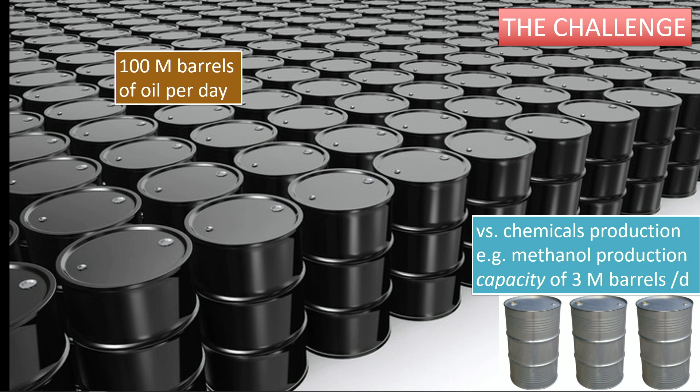To give you an idea about the size of that challenge, if you take an example from the chemical sector, the example of methanol, which is now being produced as a building block for the chemical sector, there we're talking about 3 million barrels per day of production capacity. So almost 2 orders of magnitude difference between the chemical sector and the fuel sector.

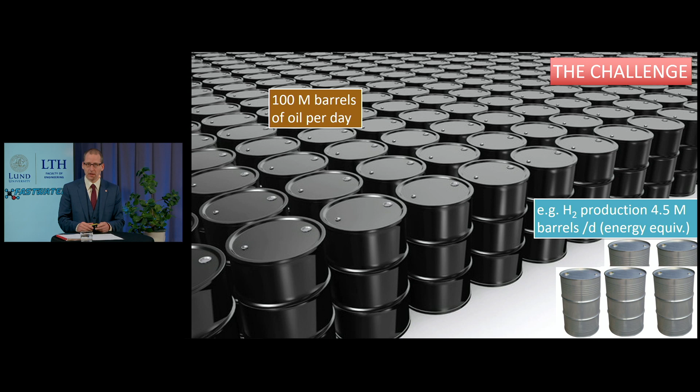Another example: there's lots of talk about hydrogen these days. We're already producing hydrogen in pretty large quantities, talking about 4.5 million barrels of oil on an energy equivalent basis. Of course, almost all of that hydrogen is currently being produced from fossil sources, or used to help produce fuels like gasoline and diesel. So clearly this is a huge challenge. How can we actually move away from being reliant on these huge quantities of fossil energy, and how can we get in the end to a future sustainable society?

Sustainability, of course, is a very broad topic, so we'll limit it today to energy. There's comforting data out there: can we move away from fossil energy? Yes, we can, because there's plenty of renewables out there. If we look at the potential of solar, wind, and bio, we can clearly cover our needs. Solar energy alone, for instance, covers about 15,000 times the amount of oil we're currently using. So the potential is out there, but there's a gigantic challenge to scale that up.

And we have another problem with renewables. Maybe there's enough of them out there, but they're intermittent - the sun isn't always shining, the wind isn't always blowing. On top of that, they're not equally distributed around the globe. So next to scaling up the availability of renewables, this needs to go hand in hand with scaling up large-scale energy buffers. Depending on where you are around the world, it will probably also be necessary to import energy - not all continents will be able to be self-sustaining in terms of renewables.

And if you look at what you need to store energy on a really massive scale, it appears that the most economic way to do that is in a very compact way of storing energy, which we know as fuels. So fuels will always have a role to play in a future sustainable society. Where do those fuels have to come from? Well, they also have to be produced from renewables, of course, to make them sustainable.

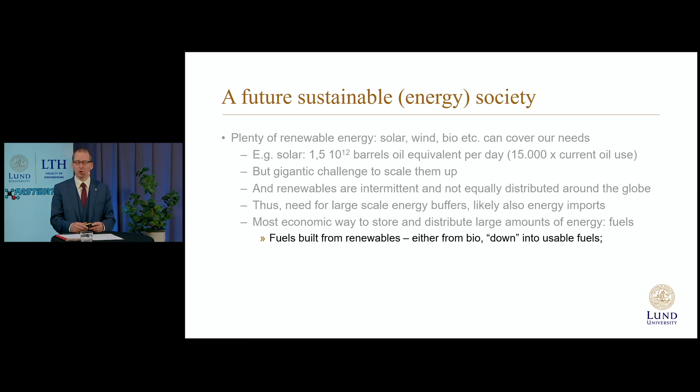So on the one hand, you can look at biomass and process that down into fuels. On the other hand, we are currently looking at, and also producing, fuels from the ground up - starting from green electricity, producing hydrogen, and then building more complex fuels or green molecules from that.

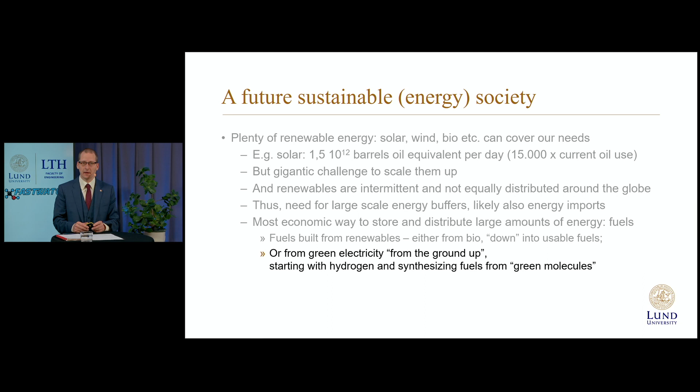So what we're talking about is roughly an energy system that could look like this in the future, where we're relying on renewables - solar, wind. The balance between those will depend, of course, on where you are around the globe. We produce green electricity that we supply to the grid directly - that's the most efficient route. This clearly explains why there's such a strong drive currently for electrification. Wherever that's possible, we should definitely electrify.

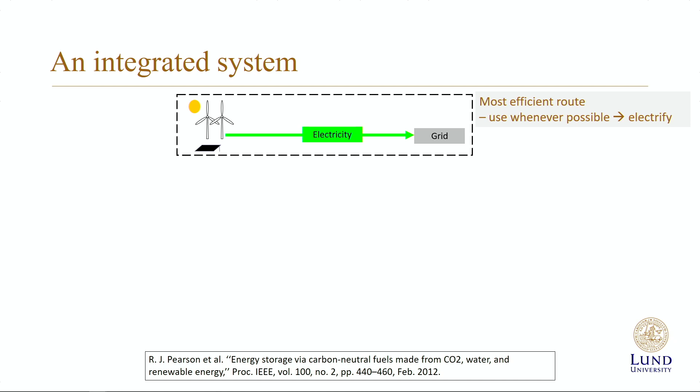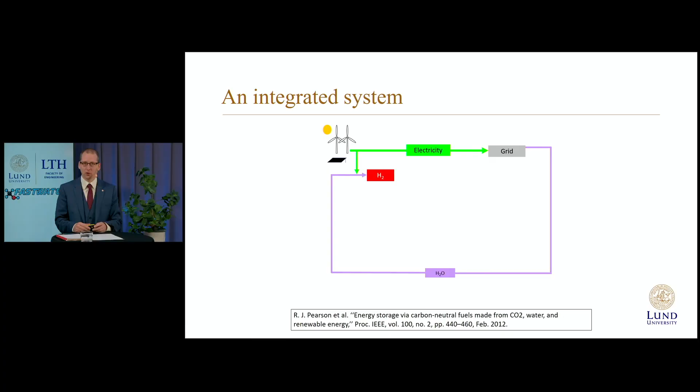But first of all, next to that, we also need to be able to buffer this energy. When there's excess renewable energy, we should use that to produce things like hydrogen through electrolysis, so that when there's a lack of renewables in the grid, we can produce energy from the stored buffer.

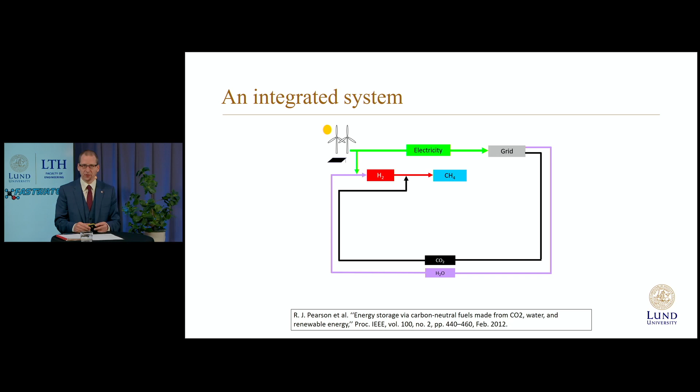Hydrogen itself probably isn't going to cut it though, because of its still low energy density. So there are plans in place, and various demo projects, to work up hydrogen into methane. We need the hydrogen to buffer renewables and balance the electricity grid, but we'll probably have to take it a step further, go to methanation, and produce what some people have started calling e-gas, so that we end up with a higher energy density. And interestingly, we end up with something for which, in a lot of countries, we basically already have our buffer - existing gas grids in which we can store this.

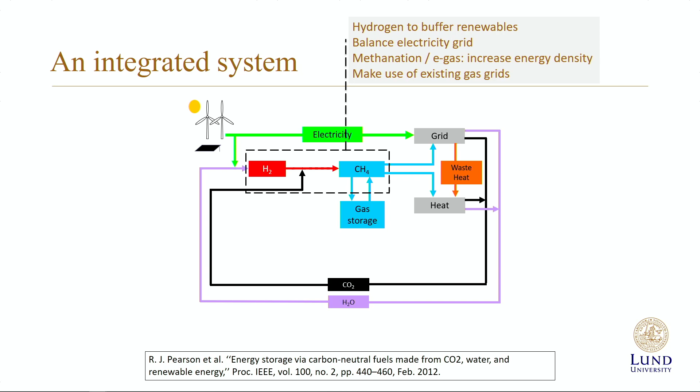That's still just gases, and we know there are issues with the energy density of gases. So if we really want to store large quantities of energy for a sufficiently long time, we have to take it one step further still and start building liquid fuels, so we can look at liquid storage. In a lot of continents, there's every year two or three weeks where there's just not enough wind or solar to cover our needs, even if we interconnect all the electricity grids. So we need to be able to bridge these periods, and they're too long to bridge with the gases I just mentioned - you really need liquid fuels for that.

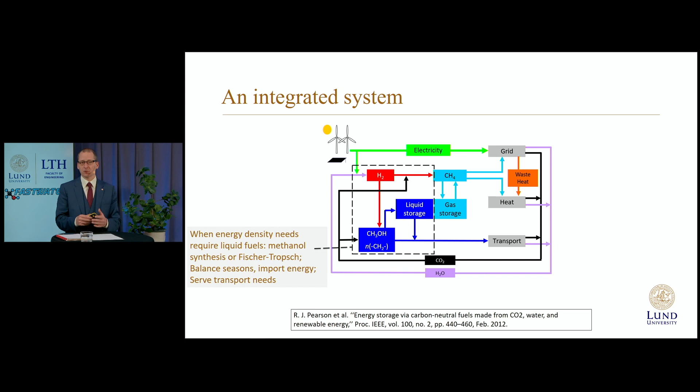So when the energy density needs are such that you require liquid fuels, we can start looking into methanol synthesis and Fischer-Tropsch processes. The idea is to be able to balance seasons, depending on the continent, and maybe import energy. But also very importantly, if you look at battery electric vehicles, or vehicles operating on gases such as hydrogen and methane, there are limits to the amount of energy you can store. So there's quite a large part of the transportation sector that also needs liquid fuels, that really needs these high energy densities.

So if we want this to work, and if we want to take advantage of the high energy density that comes with introducing a carbon bond in fuels such as I've shown here, then carbon capture obviously becomes a necessity for this to work long term.

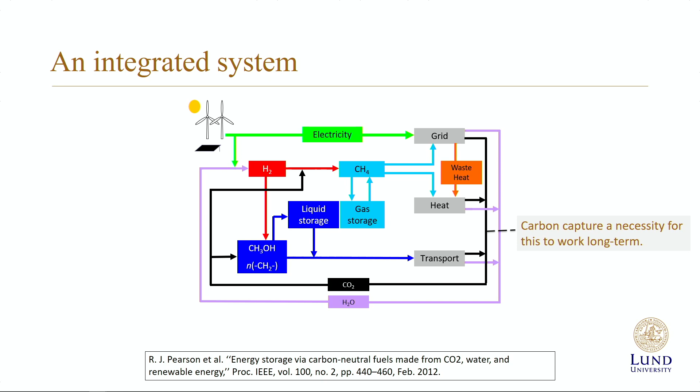That's why we've also planned this afternoon session to get updated on the status of this. Of course, there are other voices out there questioning this. Should we avoid this? Can we avoid this? Should we be looking at a carbon-free energy carrier such as ammonia? What is the real potential of battery electric, of fuel cells? Is there such a thing as sustainable combustion engines? There's a whole plethora of alternatives out there currently.

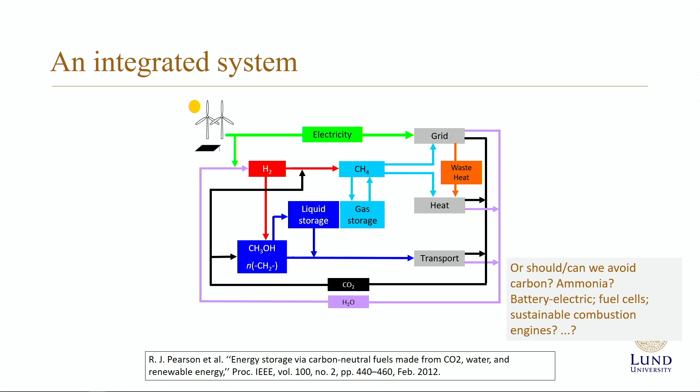So we need a set of good criteria to start singling out those that actually make sense. This is about narrowing the options. So if we now focus on transportation, mostly heavy transportation, we're looking for energy carriers, or propulsion units, that will work in the long run.

And what does that mean? Obviously it must mean sustainability. So any resource, any material that goes into building these energy carriers from renewable energy, building the powertrains, we should be able to use in a closed cycle. Think circular economy. That in itself is not enough.

Even if we can think up of something where we're using everything in a closed cycle, next to that, think of the vast quantities of oil I just mentioned. We also need these things to be scalable, and that means we should be looking at resources that are abundantly available. So we should try to avoid using scarce materials.

I've already given the example of oil consumption. Another example is just the amount of vehicles out there - that's over 1 billion vehicles worldwide. So that's a huge number that we have to find alternatives for.

Of course, using abundantly available resources also plays into these things becoming affordable. And affordability goes hand in hand with scalability.

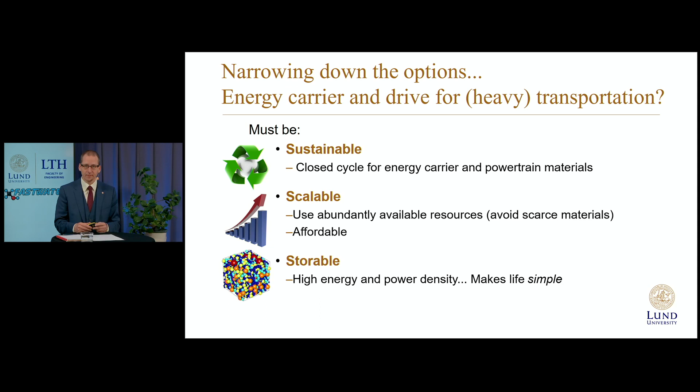Then finally, transportation - I already mentioned this need for energy density, so these things should also be storable. We should be able to pack enough energy in a compact space. So we're looking for high energy density of the energy carrier, high power density of the propulsion units. That also makes life simple, and that again links to affordability, to scalability of your alternatives.

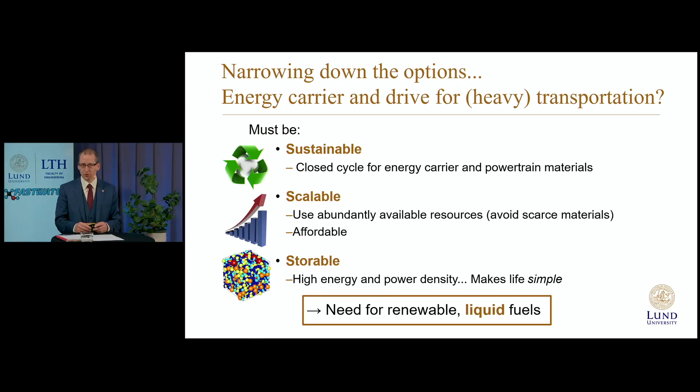And we think if you combine these three criteria, it's clear that there's always going to be a need for renewable fuels, and at least for quite a large range of transportation needs, a need for renewable liquid fuels. That brings me to the topic of today: methanol.

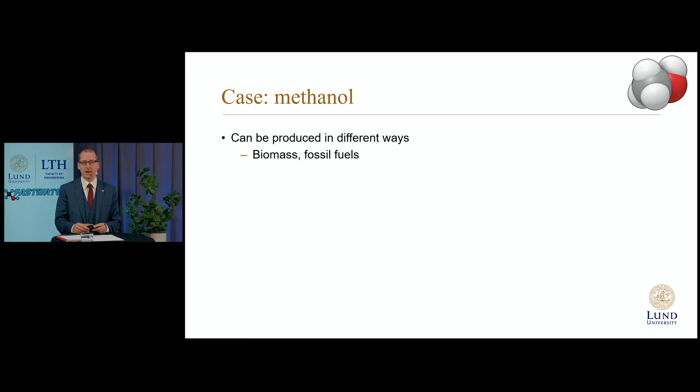Why is methanol interesting? On the one hand, because it can be produced in different ways. It can be produced from biomass. It's currently mostly produced from fossil fuels. But we have this very attractive option in the long run that we will be able to produce it using renewable energy, where we start from hydrogen being produced from excess renewables, and then we combine it with a carbon source to build our methanol.

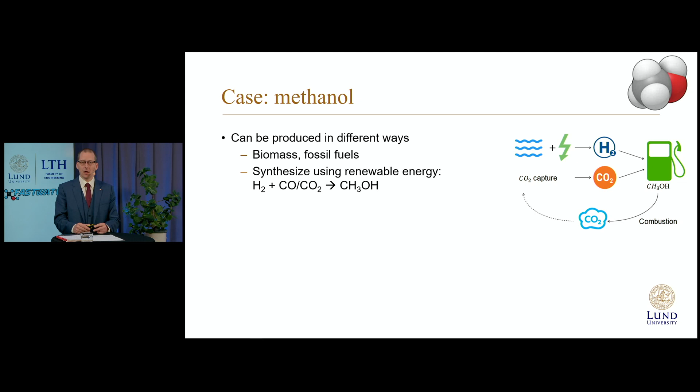And why is methanol so interesting, so compelling? Because it's liquid, and basically it's the most simple thing that is a hydrogen carrier that is liquid at atmospheric conditions. Simplicity is desired. We don't want to aim for very complex fuel formulations, because we have to remember that we start from renewables and have to synthesize these fuels.

So we have to make sure that the production efficiency is high enough, so then we're talking about the well-to-tank part of the total fuel chain. The fact that methanol is liquid enables us to make use of cheap tanks and a cheap way to distribute this fuel, which also allows an evolution of the infrastructure. And also important, depending on the application you're targeting, it also allows retrofitting.

For instance, shipping, which we will come to later this morning - we know that the average lifetime of vessels is over 20 years, so it will take a long time if we just rely on new builds for this to make an impact. It's very important to also look into the possibilities of retrofitting.

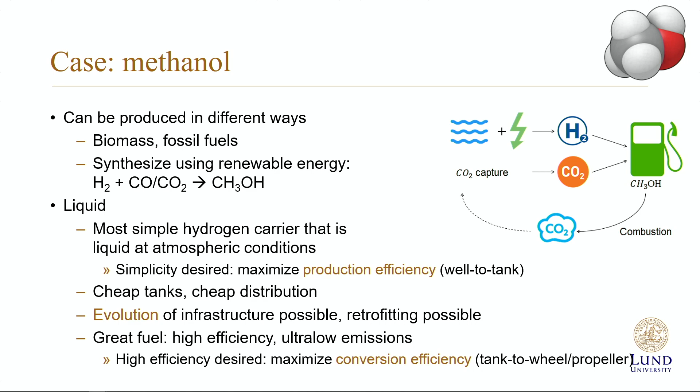Then I've highlighted the production efficiency, the well-to-tank part of it. Equally important is, of course, once you have your energy fuel, your energy carrier, your fuel, that you can make good use of that. And it happens that methanol, as you'll hear after me, enables very high efficiency and ultra-low emissions. High efficiency is also desired, because the other part of the chain is the tank-to-wheel, or tank-to-propeller part of the chain. We have to make sure that the conversion efficiency is also maximized.

Methanol currently is gaining quite a bit of traction, evidenced by the number of you signing up for this event. So we were very pleased with that.

There we see three things in motion currently. We see on the one hand the power sector, which is looking for ways to buffer energy. Methanol works as a liquid hydrogen carrier, which makes it attractive versus alternatives economically to store and distribute these vast amounts of energy. So the power sector is looking into methanol.

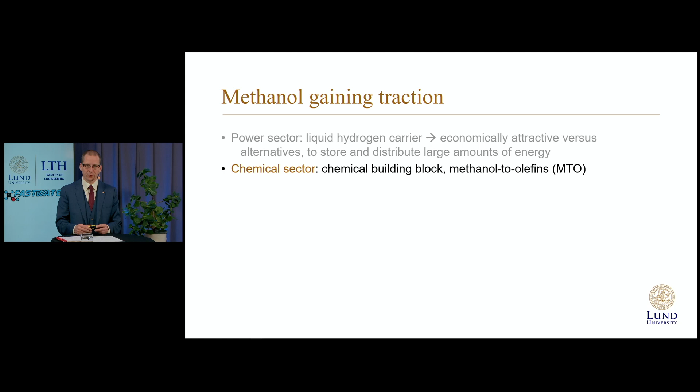Secondly, the chemical sector is looking into methanol, because we mustn't forget that almost 10% of the oil we're getting out of the ground now is actually going to the petrochemical industry to make a huge range of products, from clothes to household things, whatever. So this is also needed, or we also need an alternative there. And there methanol acts as a building block to make more complex hydrocarbons, for instance, through the methanol to olefins process. And then third, obviously, the transportation sector.

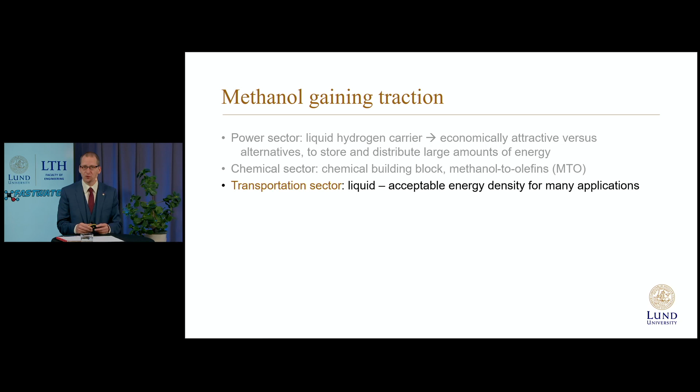There, the fact that methanol is liquid means that you have an acceptable energy density that you can cover quite a number of applications. Which brings us, first of all, to shipping.

That started looking into methanol over 10 years ago, when new pollutant emission regulations loomed. So we had the IMO Tier 3 emission legislation coming up, and then people were looking for the economically most feasible way to cut oxides of sulfur emissions and oxides of nitrogen emissions.

Methanol offered a possibility to do that, but gradually, in recent years, the shift started to look into greenhouse gases. IMO has put forward the target of cutting greenhouse gas emissions from shipping by 2050 by 50%. So that's a huge challenge.

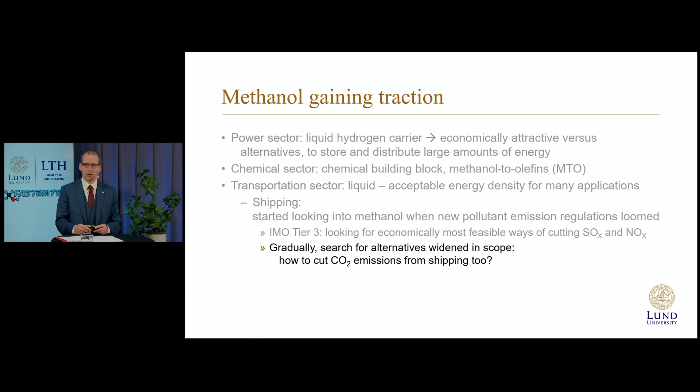And so now the scope is actually widening and looking at renewable methanol as also a way to cut these greenhouse gas emissions. So there have been several initiatives out there investigating methanol as a fuel for shipping.

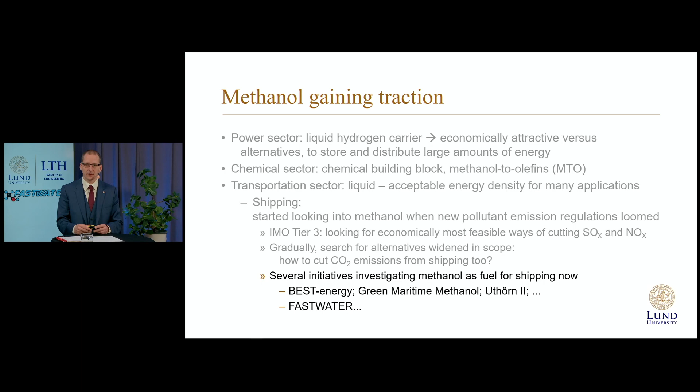There are other projects out there currently, such as the Best Energy project in Belgium, looking at how e-fuels link to the evolution in the energy sector. There's the Green Maritime Methanol Consortium in the Netherlands. Germany is looking to convert vessels to methanol operation.

And then obviously I'd like to take a few minutes to introduce the FASTWATER project to you now. So FASTWATER, that's short for Fast Track to Clean and Carbon Neutral Waterborne Transport. So that's a Horizon 2020 project, which is looking into methanol as a fuel for shipping.

So the project's core idea is basically this circular economy idea that I showed you earlier. Can we produce methanol in a sustainable way, in a way that we can actually power our ships on?

As mentioned, there's a number of initiatives that have been going on in the past years. There are vessels out there sailing on methanol. But when we sat down to draft the proposal for this project, we started realizing that there's still a number of bottlenecks that we're running against.

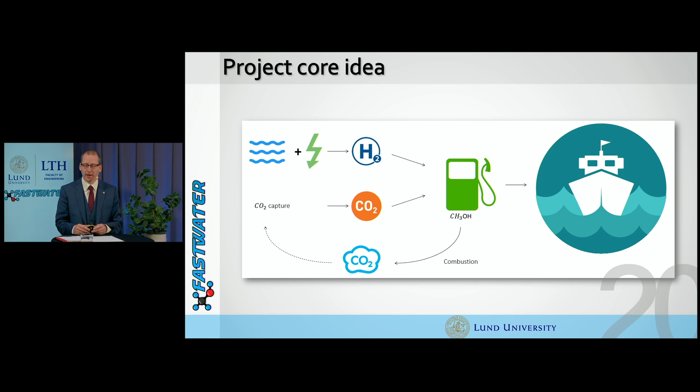So what are the challenges that we're trying to tackle with this project? One of the bottlenecks that people informed us about, people that wanted to actually get started on using methanol as a fuel, was just very practically the availability of engines.

So there are engines out there, as you also will hear later this morning, large two-stroke engines. That's a commercial product on methanol. But there's a lack of four-stroke methanol engines, engines that are a bit smaller, that cover a larger type of applications of vessels.

And there's also, as mentioned, a need for retrofitting of marine engines for methanol operation. So that's something we will target, and I'll explain a bit more concretely how we're going to do that in a minute.

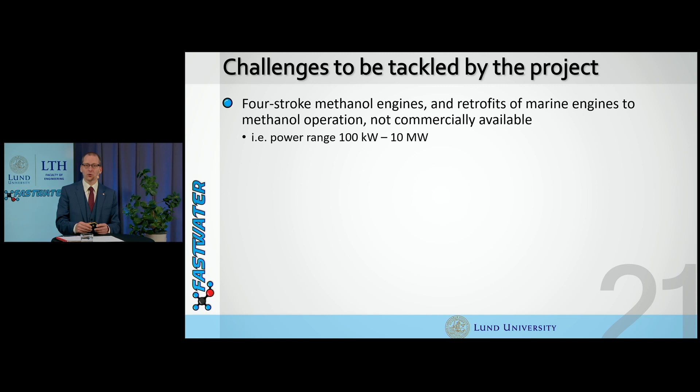In order to get the whole chain working, of course, to think long term, it's also equally important that we set up a demonstration of the full chain, going from renewable methanol production to ships actually sailing on it. So that's a topic that we'll pick up throughout the day.

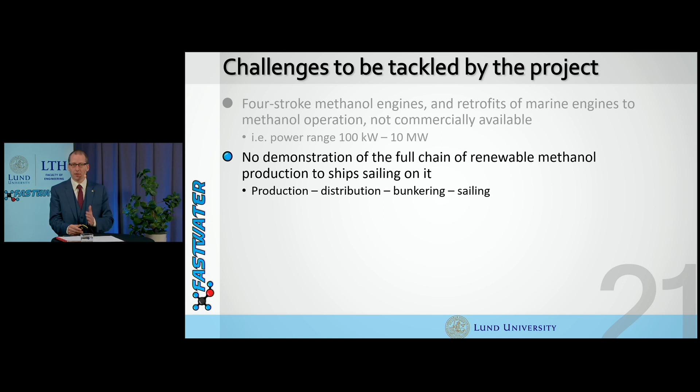Any alternative fuel that you're going to introduce, there's a huge number of challenges to be overcome because this is such a complex chain and so many actors that you need to get moving. So we're talking about renewable methanol production through distribution, through bunkering, through then actually ships sailing on it.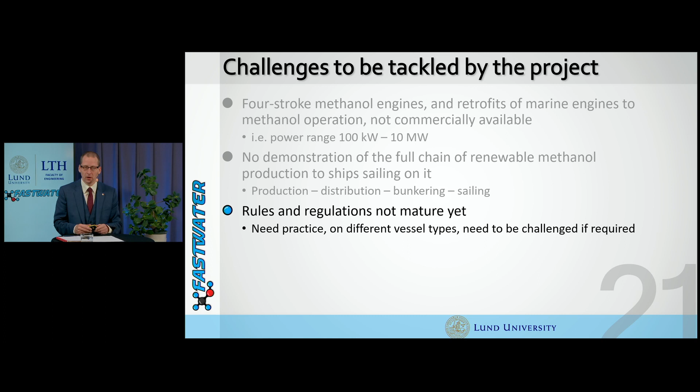For the application of shipping, we've observed that there are some initial rules and regulations that allow you to run on fuels different from classical fuels, but this currently relies on acceptance on a case-by-case basis and is very much focused on particular fuels such as LNG, which have quite different characteristics from methanol. So we want to look at whether we can simplify these rules for methanol.

We want to lower the thresholds to make it easier for people to convert vessels to methanol operation. This is a 4-year project that started last June, has 14 partners, and has a total project budget of 6.4 million euro, 5 million euro of which is coming from EU funding through the Horizon 2020 program.

So how are we going to make sure that we have engines? Very concretely, shown on the left, we're going to work on making medium speed engines available on methanol in dual fuel operation, with methanol being ignited by a pilot diesel injection. We'll demonstrate 2 megawatt engines, and by the end of the project we plan to have engines commercially available between 1 and 4 megawatts.

At the top right, you see a high-speed engine, a 400 kilowatt engine that will end up in one of the other demos, operating in MD95 mode. That's a single fuel solution where we compression ignite a mixture mostly consisting of methanol, but with some 5% ignition enhancer to ensure ignition.

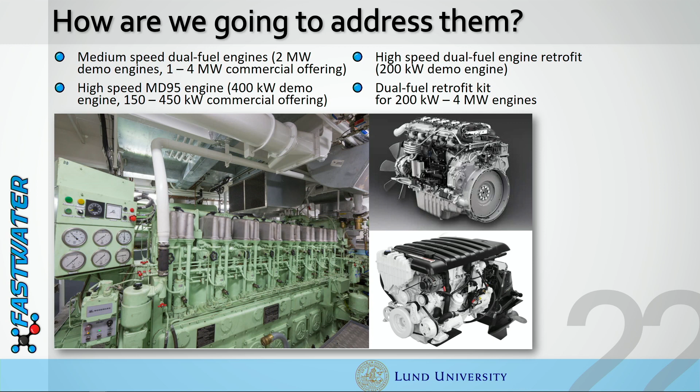I've mentioned the demonstration of these engines - that will be done in these demo cases. At the top left, you see a harbor tug that will be converted to use 2 medium speed engines, 2 megawatts each, running dual fuel operation on methanol, sailing in the port of Antwerp in Belgium.

At the top right, you see a pilot boat that will be sailing off the east coast of Sweden, equipped with the high-speed MD95 engine. At the bottom right, you see a Coast Guard vessel equipped with the retrofitted diesel engine, converted to dual fuel operation with methanol, off the coast of Greece.

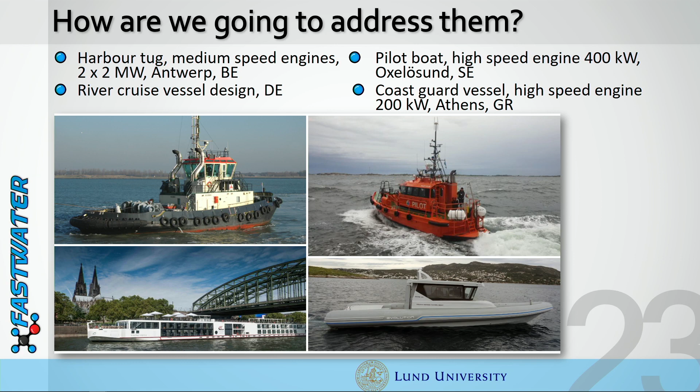And then finally, at the bottom left, we're also going to work out the design for a river cruise vessel. What is needed to have these river cruise vessels operate on methanol? How is the design going to be impacted?

So the way we've tackled that is by installing an advisory board to give us advice on the best routes for initial exploitation, to help us out with increasing the project exposure, identifying early movers, and also help out, if needed, with the adoption of simplified guidelines.

Renewable methanol is a very important part of the puzzle, so we have a number of renewable methanol producers on board. On the other end of the chain, we have ship owners who have expressed interest in running some of their ships on methanol. We have authorities to give us feedback on guidelines, and propulsion technology manufacturers, engineering consultancies, and R&D institutes as the technology providers.

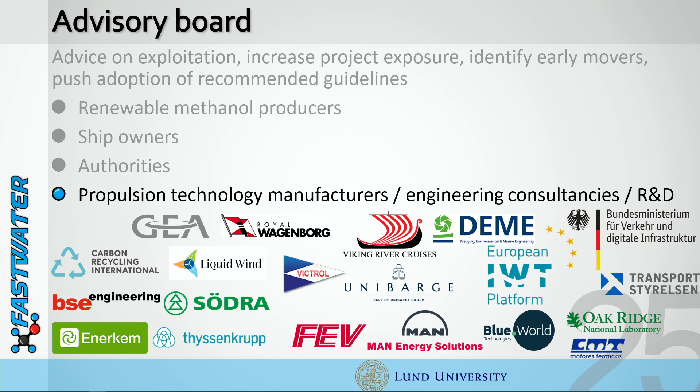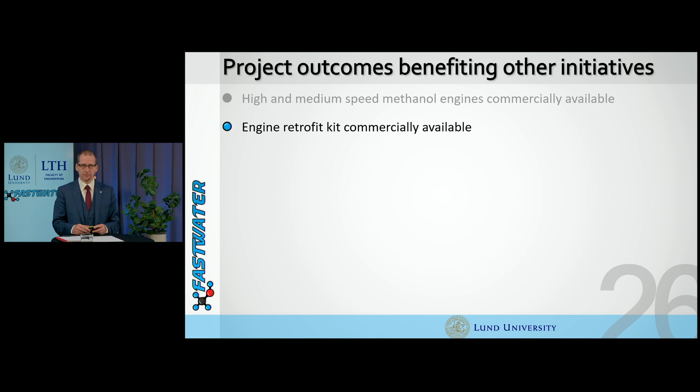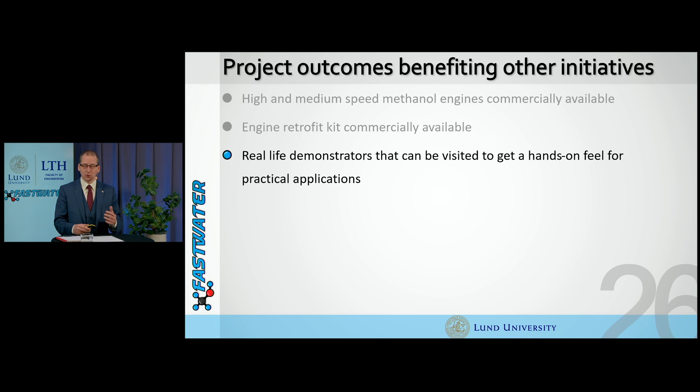So how is this going to help us move forward? We hope the following things will benefit other initiatives looking into methanol too. First, the engines becoming commercially available, which make it feasible to start converting vessels, and the same for the engine retrofit kit. Very importantly, these real-life demonstrators will be clocking up a lot of sailing hours and can be visited to get a hands-on feel for practical applications of methanol as a fuel. Along with running these demonstrators, we will also test training material for crew and onshore personnel, since this is still new and it's important to install the right type of training.

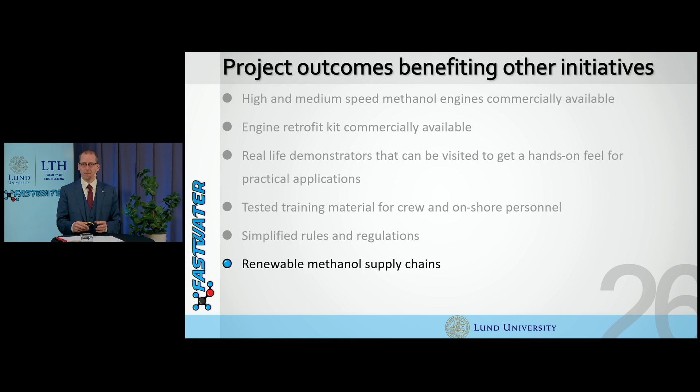These simplified rules and regulations I've already mentioned, as well as the renewable methanol supply chains, will really demonstrate them. And then at the end, we hope that we will be able to propose business plans that will launch some investment decisions off the back of this project.

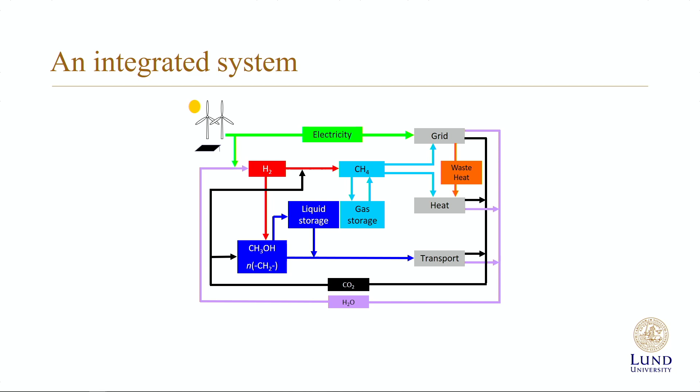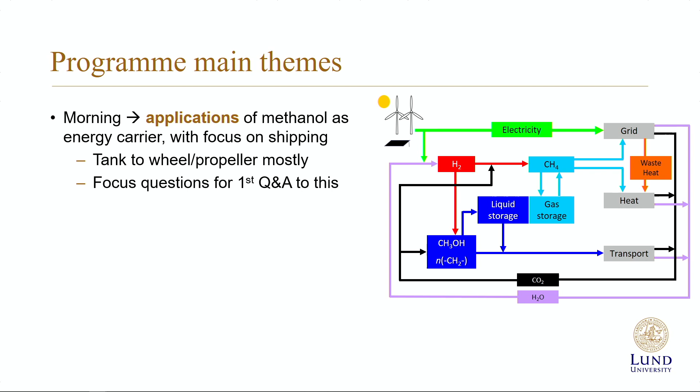I will first give you a brief insight into what the rest of the day actually looks like. So I've showed you this picture of the global energy system, and we're going to use this more or less as a hook for the rest of the day, in the sense that in the morning session, we're mostly going to focus on applications of methanol as an energy carrier. We're going to focus on shipping in particular, because that's where, at least in Europe, we see the most movement currently. So that means that we're talking mostly about tank-to-wheel, tank-to-propeller. I would also ask you to focus your questions for the first Q&A session at the end of this morning on this. So then we're basically talking about the green part here. Anything from having your energy carrier to then using it.

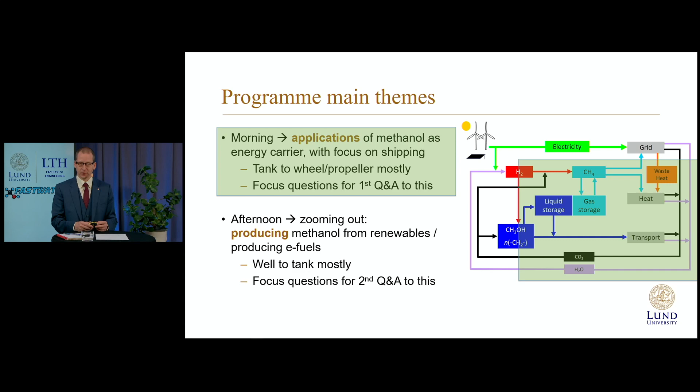Whereas in the afternoon, we will zoom out a bit, and then we're going to focus mostly on the production side of things. So what about producing methanol from renewables? How energy efficient is that? What's the scaling of that currently? So producing e-methanol or e-fuels in general. That's well-to-tank mostly. So you can focus questions concerning that part to this in the afternoon.

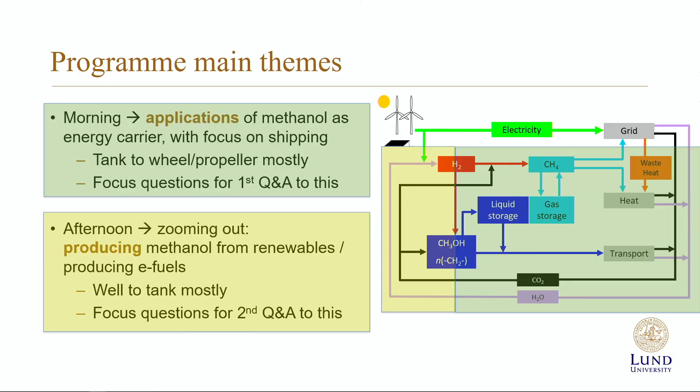So what do we have in store for you for this morning session? Looking into the program, obviously this one is ongoing and wrapping up now. Right after me, we will have a look at findings from concluded methanol projects. So what type of conversion efficiencies have we been able to measure? What type of emissions are we talking about? So the state of the art concerning methanol engines primarily, what's done and what is left to do.

After that, we'll zoom out a bit more and see what's happening globally, what's happening worldwide with methanol as an energy carrier. And then we'll look into some early mover experience. I've mentioned these large two-stroke engines out there operating on methanol. So what are the takeaways there from this initial experience of using methanol as a fuel, in this case for shipping?

Then we'll have a short break, after which we'll continue with looking into methanol for fuel cells. So what's the status there? What are the remaining challenges?

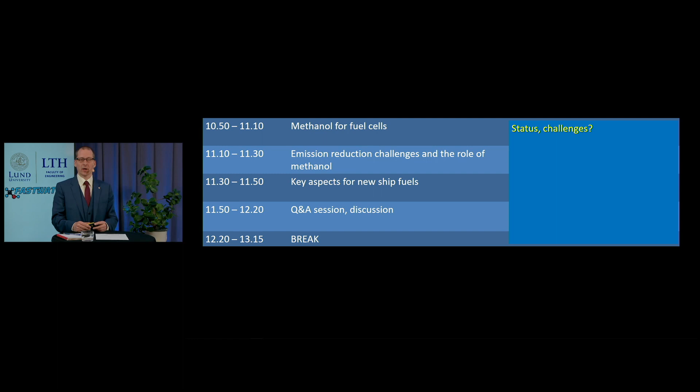Then we'll look at emission reduction challenges and the role of methanol for the application of shipping. So we'll get the perspective of a ship owner and operator on alternative fuels and how does methanol compare with competing options. We'll get a similar perspective from a shipyard. So what does it mean to build ships that can make use of these new fuels?

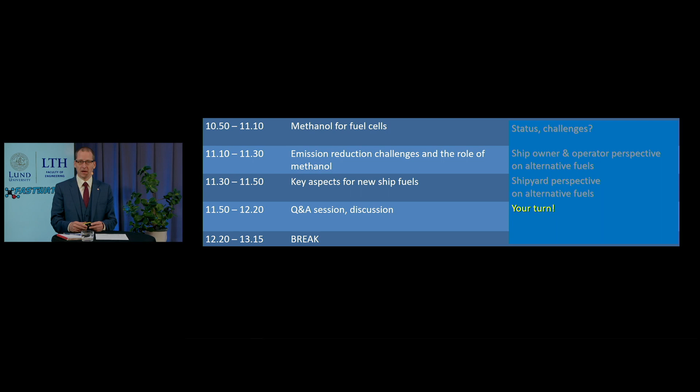After which we have time for the Q&A session. So then it's up to you. Make sure that you prepare some good questions to make this as useful as possible.